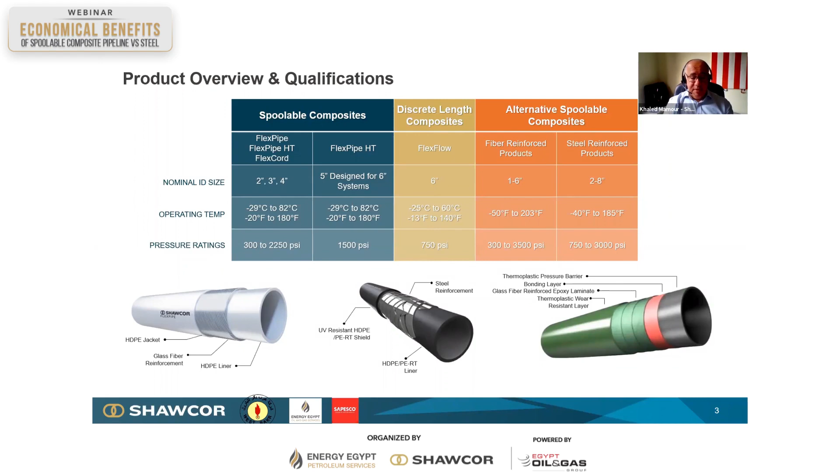Right, how do we connect the ends of these type of pipes? No welding is involved, as you know, because it's not made of steel. So some suppliers use threaded compression and others use hydraulic compression to connect the pipes. And pipe suppliers usually provide the connection equipment and training of personnel to use it, as well as assistance with using it to install the equipment. The fittings are in corrosion-resistant coated metal or made from corrosion-resistant alloy. Together with the pipe, they form a very good corrosion-resistant product.

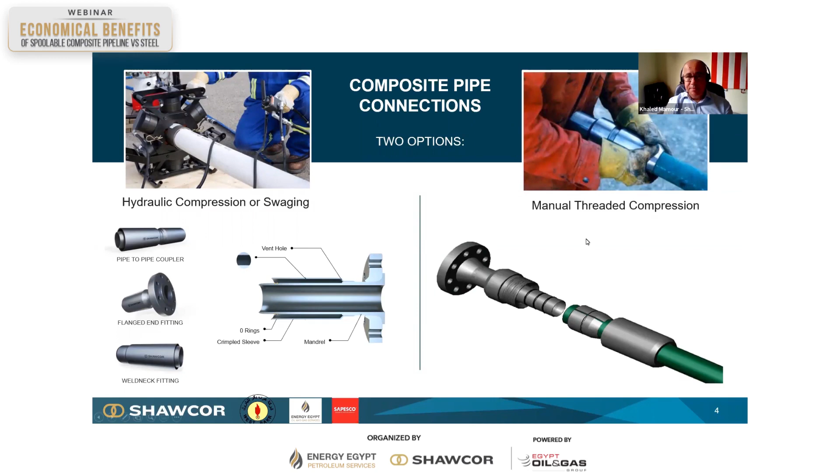Right. Let's look at the applications. Where are these pipes used? Applications for this technology are diverse, as known through Shawcor's experience and installation base. The most common use is in oil fields, as oil and gas gathering lines, water injection, and wastewater. Due to the inert nature of the inner layer of HDPE, the pipe can handle many different types of fluids.

To mention some of the applications that might be of interest, for example, aggressive gases, such as carbon dioxide or hydrogen sulfide, zero flaring, liner pull for rehabilitation of existing pipelines. For example, you have a pipeline that is defective and you want to replace it. Instead of replacing it and trenching and taking the pipe out, what you do is just pull a composite pipe through it. Temporary lines, and of course these pipes as well, one of the major advantages is that they could be reused.

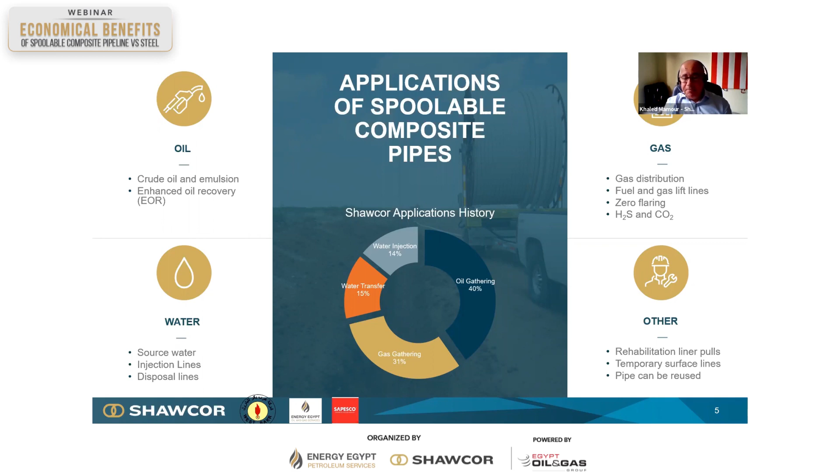Good morning, everybody. In order to highlight the advantages of installing a spoolable composite, I would like to review with you a typical steel pipe installation process. The life cycle starts with sourcing the pipe from a manufacturer, getting an external protective coating, and transporting the pipe to a warehouse or distributor. The site is cleared and graded before the pipe is deployed. Field bends also need to be performed, and the pipe needs to be aligned and prepared before it is welded.

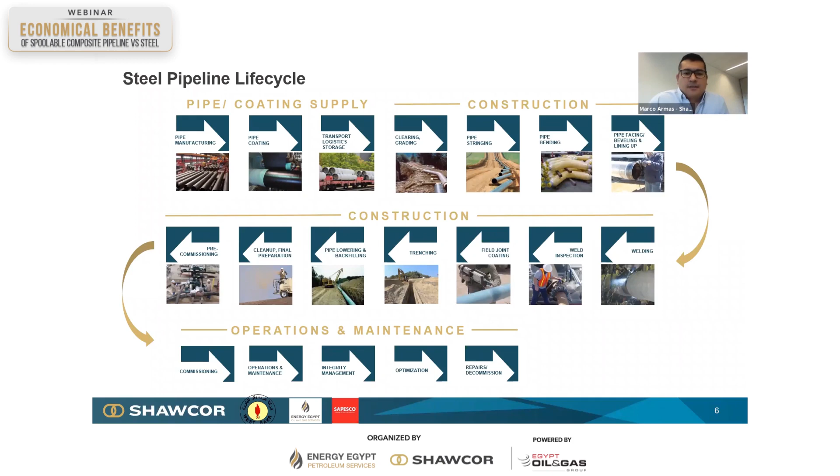Welding inspections and field-applied coatings need to be performed before the pipe is lowered. After that, the line is commissioned and handed to operations. This is the full steel pipeline life cycle. Let's compare now this one with the composite pipe life cycle. The composite installation reduces or eliminates several processes of the typical steel project. Processes in this slide within the gold box are simplified, and the gray boxes are removed entirely.

Pipe transport is typically simplified as the pipe goes directly from the manufacturer to the installation site, minimizing trucking and storage costs. Clearing and grading is faster and causes less disruption due to minimizing workspaces along the route. A spoolable pipe can be deployed faster than steel, and it can be safely done with no large, expensive equipment. Bending, inspections, and field coatings are typically eliminated from the construction process.

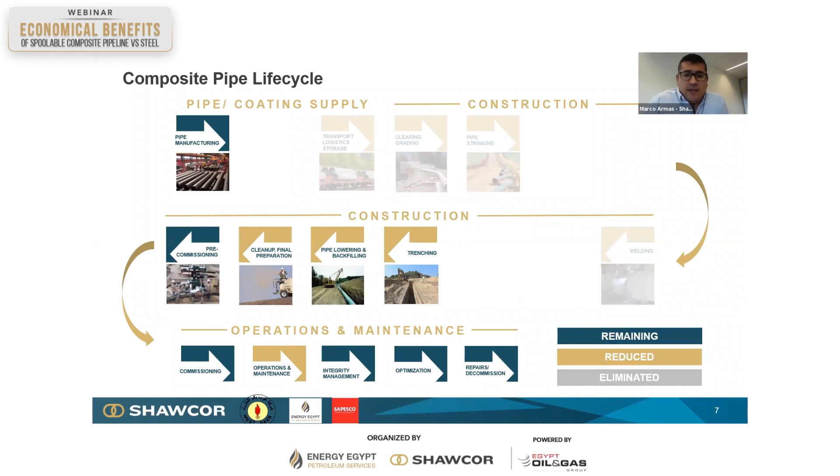Welding is reduced and is typically only required at the end connections, just in case you are not using a flange connection. The smaller right-of-way and the flexible nature of composite pipe installation reduces the time and cost of trenching, backfilling, and cleanup. Finally, the operations and maintenance requirements for composite lines are reduced due to the corrosion-resistant materials.

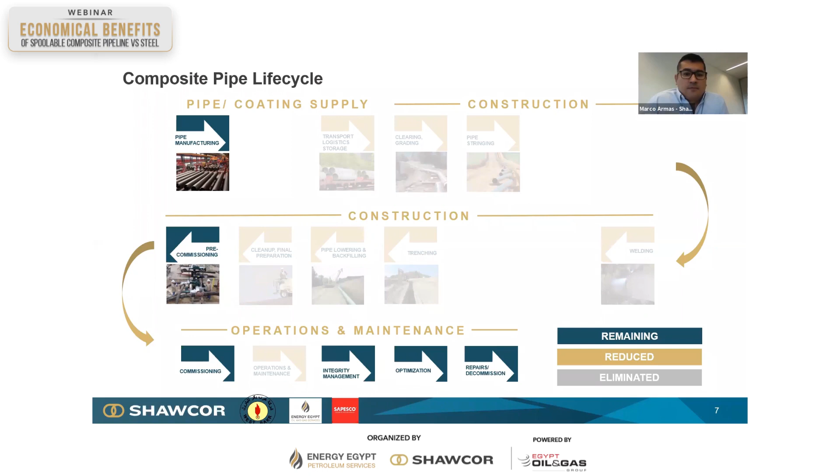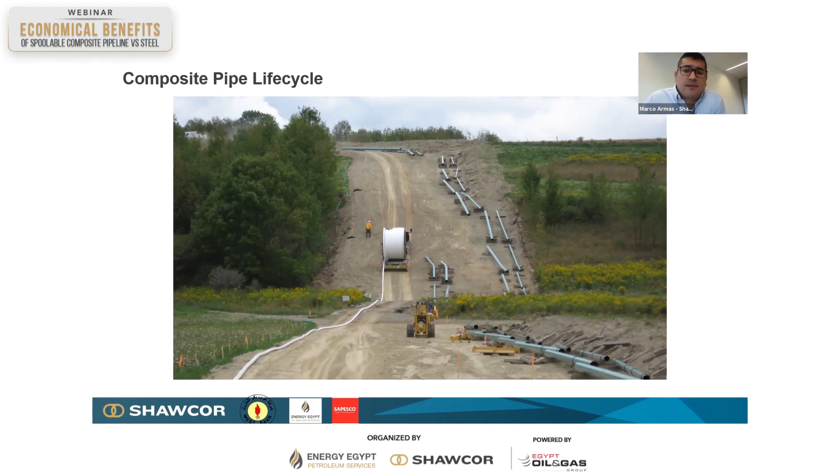Generally, a composite product can be installed 20 to 30% faster, which will save you money on the installation and reduce the time to first oil. This, of course, will depend on your project-specific conditions. For example, in the Bolivian jungle, a 10-kilometer, 4-inch line was scheduled to be completed in 6 months on steel. The same contractor using Shawcor composite pipe installed the line in just 40 days. We are comparing 6 months against 40 days. Later, Amer will explain the West Bakr experience in Egypt through a case study.

A composite installation can be done with less manpower and less equipment than an equivalent steel pipeline. The composite line requires less trucking. For example, 1.8 kilometers of 4-inch pipe can be shipped on a single truck, and only one excavator is required for the installation. The material can be deployed with trucks and trailers, reducing the requirement for heavy equipment. Total manpower is reduced from 10 people on average on a steel line to 4 on the composite line. Fewer specialized workers are required, and the installation is less labor-intensive overall.

An additional person may be required to install the connectors or fittings, but that cost can be minimized through planning or training your local contractor. Currently in Egypt, we have a very good contractor that is totally trained. X-ray inspection is not required on the composite products, which can also be brought to surface without steel risers. Demobilization is also simplified due to less equipment being required for the install.

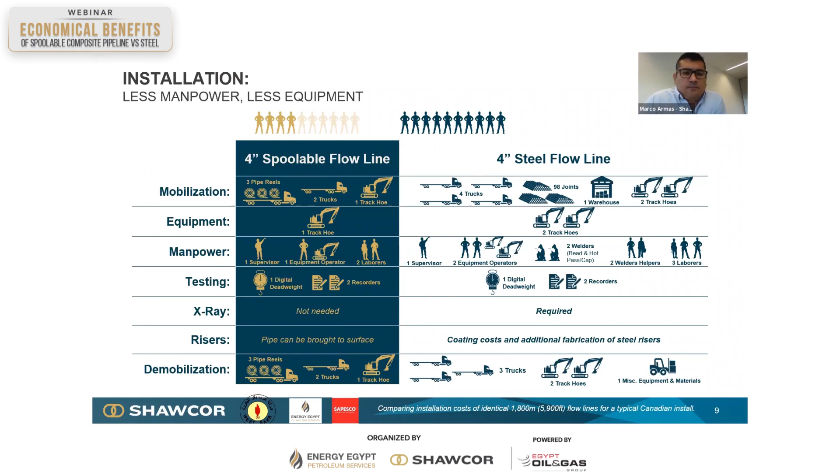Let's chat now about deployment methods. Spoolable pipes are very robust and can be installed using a wide variety of techniques in nearly all terrains. Our pipes have been installed near the Arctic, in the desert, in wetlands, and in the jungle. Trenching is the most common installation method for spoolable composite, and practically the installation can go as fast as the ditch can be opened or stay open. Surface lines are popular due to the low cost and the short time required to install the pipeline. It is possible to deploy and install composite pipe up to 50% faster than a steel pipe.

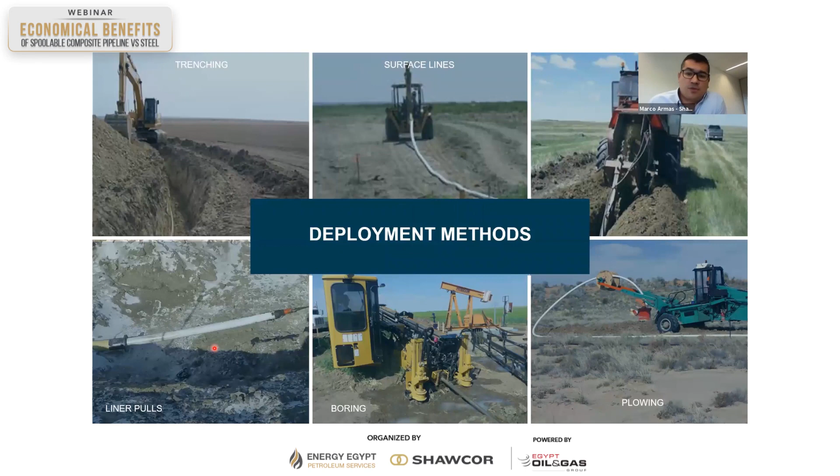Plowing and chain ditching are very successful in areas with little pipeline infrastructure due to the low impact and the installation pace. It is possible to install up to 2 or 4 kilometers per day using these techniques, which are very popular in Canada and Australia. Horizontal drilling or boring has typically been used for road crossings or terrain crossings, but it has become a preferred method for some users due to the minimal environmental impact. In most applications, it's more reasonable to pull 2 full reels of pipe, and longer lengths have been achieved under good conditions. Liner pulls are also considered an easy solution when there is an existing failed steel line.

Let's chat about total project cost. Using a spoolable composite pipe can decrease the overall project cost between 20 and 25%. This is a conservative estimate based on averaging a variety of conditions. A well-planned installation with an experienced contractor could likely beat this estimate. Significant costs are realized during the installation. The reduced crew size, lower equipment size, and the fast installation pace create a very efficient installation. This benefit can lead to up to 30% lower installation cost compared with steel.

Currently, a spoolable composite may require a large upfront investment compared to steel, but once you consider the total project cost, there are significant savings when using a spoolable composite. For example, India is a region with very cheap labor and low steel pipe prices, but it's still economical to use a spoolable product due to the installation efficiencies.

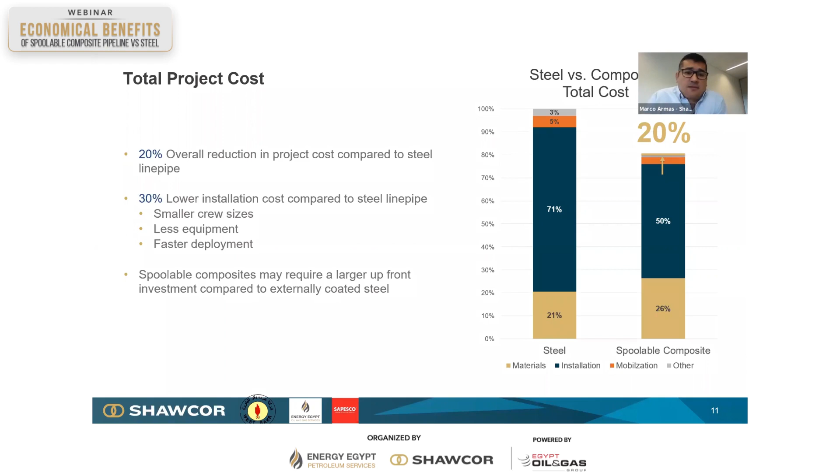Let's chat about corrosion resistance. Besides the installation advantages, a spoolable composite can also save money during the operating life. Due to the corrosion resistance, it's possible to reduce or eliminate the use of chemical corrosion inhibitors. For a typical gathering system, this could result in between $20,000 and $40,000 annual cost savings. An operator with a large composite installation base could be saving over $500,000 in chemical costs per year.

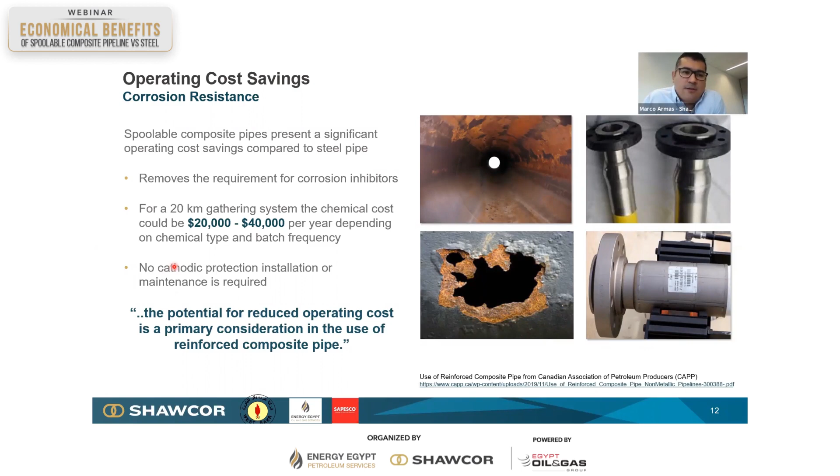In addition to the chemical cost savings, composite products can also eliminate the requirement to create or maintain a cathodic protection system. Of course, that will depend on your local regulatory entities.

Let's chat about the liner material. Most spoolable composites have an HDPE inner liner. These materials can reduce the initial buildup of scales or paraffins, which leads to reduced pigging requirements. The smoothness of the liner material also leads to higher flow rates and lower pumping costs compared to an equivalent steel pipe. Steel can also become rougher over time, which leads to increased pumping costs and pressure.

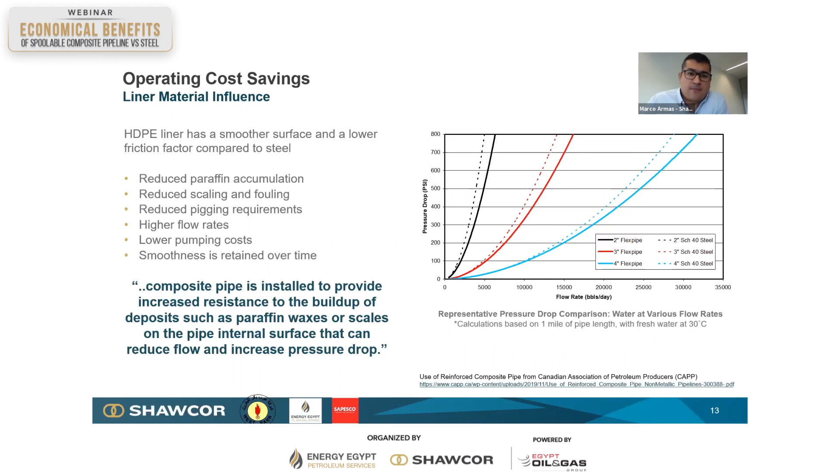Here, we can see a summary of the testing used to design and qualify the Shawcor spoolable product as per API 15S. On the design pressure capability, one of the most important tests is the regression pressure testing. In the application performance, we can highlight the aromatic exposure, the rapid decompression testing, and the UV exposure or resistance. On the installation side, one of the most important for us, of course, is the impact resistance test.

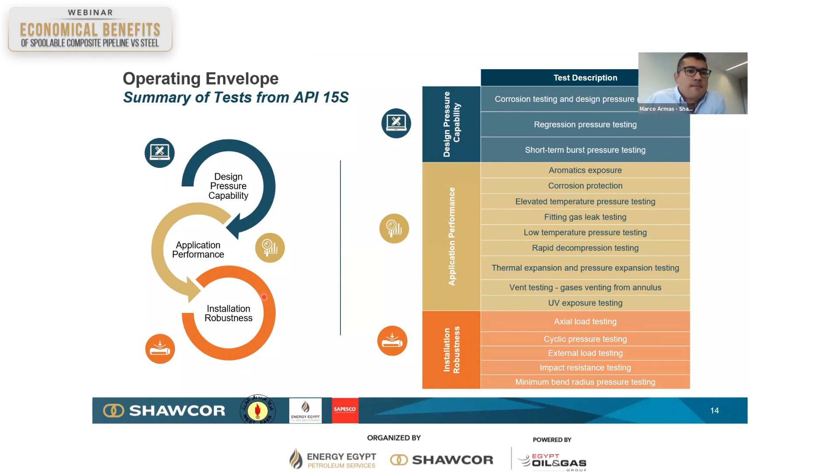Next slide. Thank you. Right, so a bit about Shawcor's flex pipe. Shawcor's flex pipe has been around for over 18 years, during which we have supplied over 40,000 kilometers of pipe and over 180,000 fittings to clients all over the world. We have supplied some of the largest oil companies in the world, including Saudi Aramco, Chevron, Exxon, and Shell.

We have supplied over 1,000 kilometers in the Middle East with installations in Saudi Arabia, UAE, Kuwait, Iraq, Oman, and others to follow shortly. Some clients have standardized on our technology and products. We pride ourselves on our customer service. Feedback from existing clients reinforces that all the time.

Recently, we have supplied 26 kilometers to West Bakr in Egypt. Sapesco did a very good job at installing the pipe and are trained and have the required equipment in country to do more as and when required. May I now let engineer Amr Tawfik of West Bakr tell you more about this specific installation.

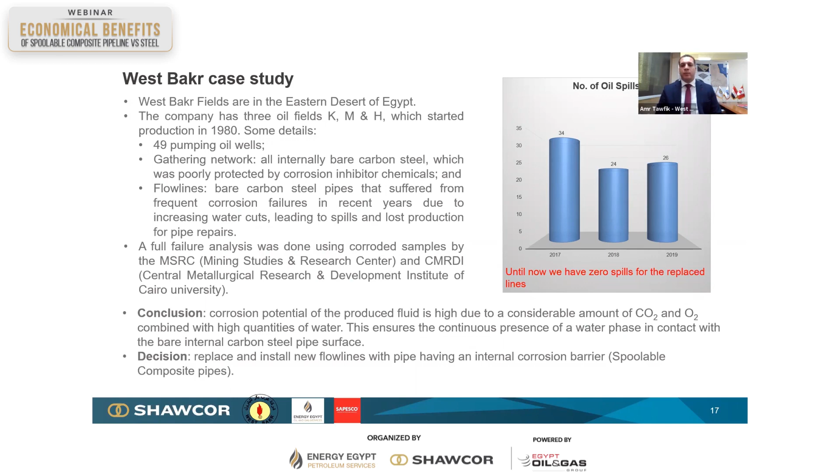The project budget was $1,250,000 US. The awarding date was the 10th of October 2019. The completion date was the 10th of February 2020. The main contractor was Energy Egypt, and the subcontractors were Shawcor for material supply and supervision, and Sapesco for installation.

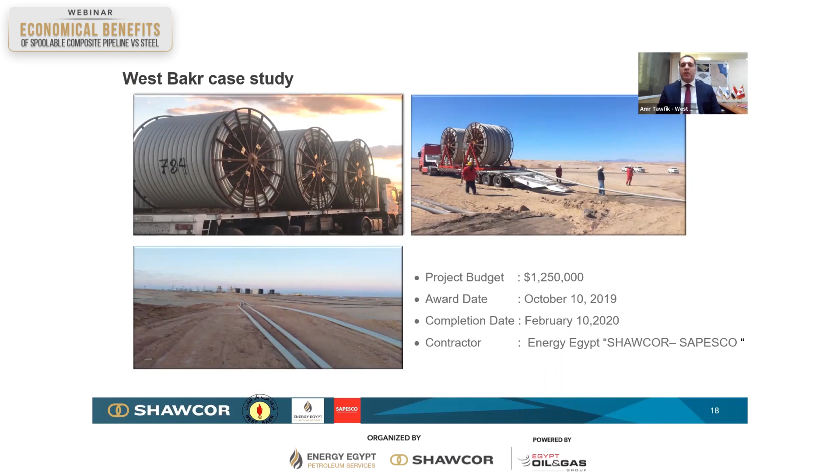Let's go through the measurable impacts of this project. No more oil spills, which is considered as a direct environmental impact. No more production losses, which is a cost impact. No lost time for workers for pipe repairs.

Smooth production and operations, saving the cost of using corrosion inhibitors in terms of chemicals, pumps, corrosion monitoring system, with about $50,000 US per year, saving the cost of replaceable parts of pipe repairs that require rental equipment to perform the repair jobs and spilled oil recovery, saving the cost and time of installation by 30 to 40% compared to carbon steel pipes.

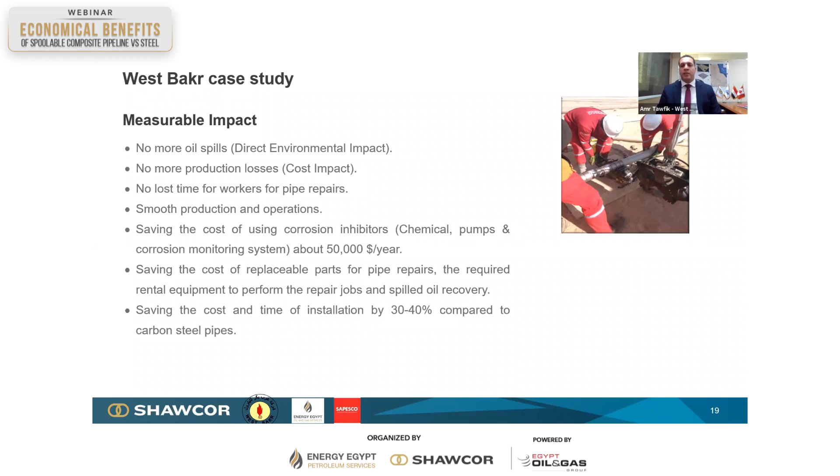Finally, the quality of delivery of this project. The project was completed within 4 months, starting from the date of award till commissioning and startup within the approved budget. Project deliverables are matching the desired objectives.

Challenges that we faced were the execution duration of installation and tie-in of around 25 kilometers of spoolable pipes and 20 hydro tests. The contractor managed to deal with this by the following: safe installation where zero lost time incident recorded, professional execution team and supervision, installation schedule and procedure commitment, proper installation equipment and tools, excellent installation progress reporting, and high-level managerial follow-up and collaboration.

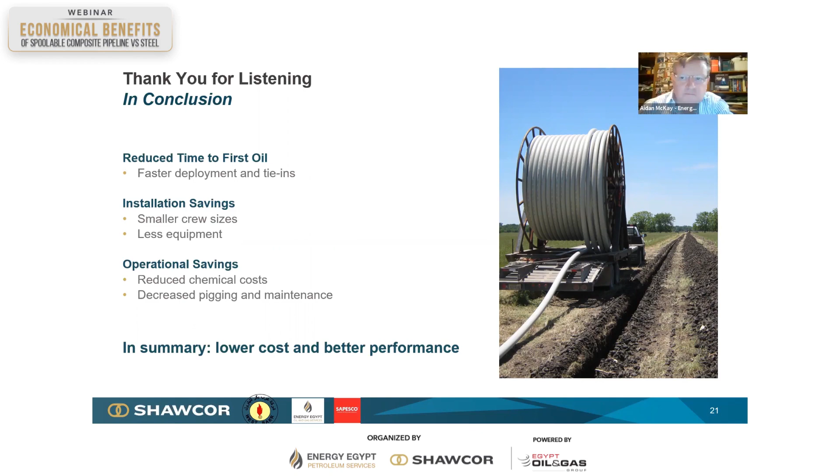Thank you, Amr. So I think now just to wrap things up, I'm going to jump to the questions and answer session. So we've got some questions coming out. I've also been emailed some questions. First question we have, the suitability of flex pipe on something like a firefighting line. Would it be suitable for a firefighting line? I guess the question would revolve around whether or not the line is flammable. I don't know. Marco, do you want to handle that?

Yeah, but did you mean the water for transportation, water for fire emergencies, or is the pipe fire resistant itself? And the question itself was, is it suitable for application of firefighting lines? I mean, obviously for transferring water, it's very suitable. Yeah, it's very suitable. We just need the application review with the operating parameters, and we will recommend to you based on the type of pump. You can use flex pipe or Flexcord products.

Okay. If I may just add to that, sorry. Just for peace of mind of potential users, what we do usually, and all the time really, is to submit an application review to the user. And from the information that they supply to us, we will make sure that the pipe is suitable for the product or not, for the application or not.